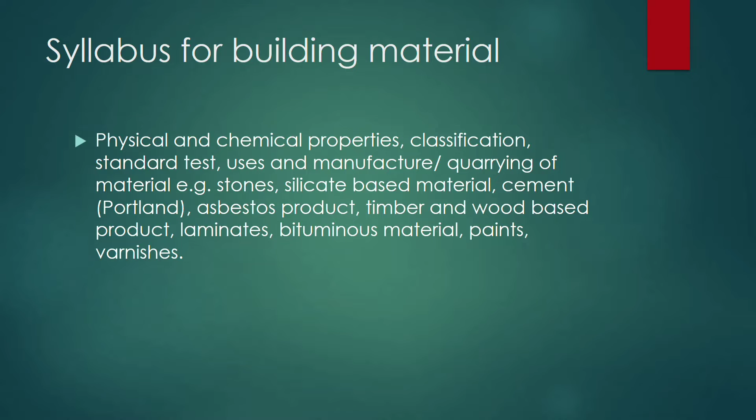And other paint varnish. In this video, I will complete some topics of building material. So first topic is source of aggregate. Second topic is physical and chemical properties of aggregate. And third topic is test on aggregates.

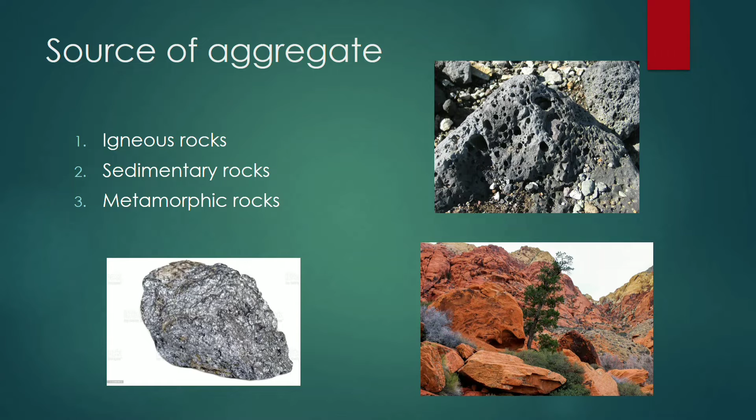First topic is source of aggregate. So there are three types of source of aggregate. First is igneous rock, second is sedimentary rock, third is metamorphic rock. It is formed by weathering actions from the environment. In these pictures are various types of source of aggregate.

Metamorphic rock shows the foliated structure, and in this sedimentary rock the thickness of foliation may vary from a few centimeters to meters of thickness. A very large quantity of sedimentary rock is used for building materials.

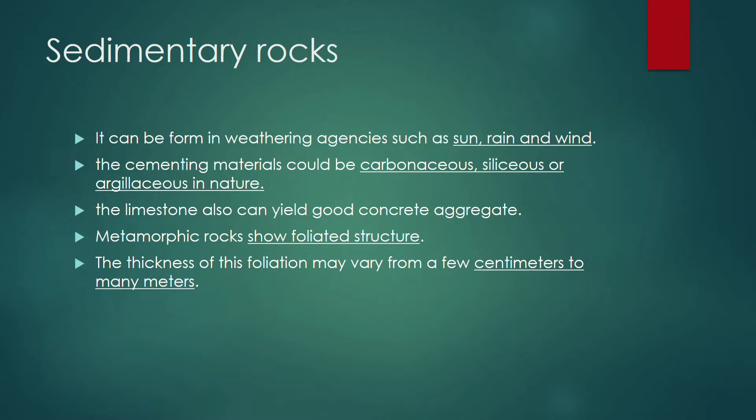Igneous rocks are mostly formed from lava cooling to form this rock. These are very hard, tough and dense rocks, it can be massive structure, glassy material, and the main content will be silica. Color of rock is light color and dark color.

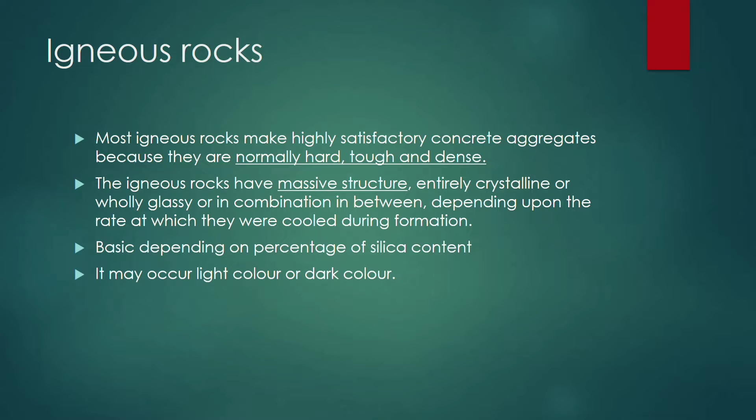Physical and chemical properties of aggregate. So first is size. Aggregates are divided into two types of size: coarse aggregate and fine aggregate. Coarse aggregate is more than 4.75 mm and fine aggregate is less than 4.75 mm. Maximum size of aggregate commonly used in field is 80 mm.

Using a large maximum size will result in reduction of the cement content, reduction of water requirements, reduction of drying shrinkage. Maximum size of aggregate that can be used depends on thickness of section, spacing of reinforcement, clear cover, handling and placing techniques.

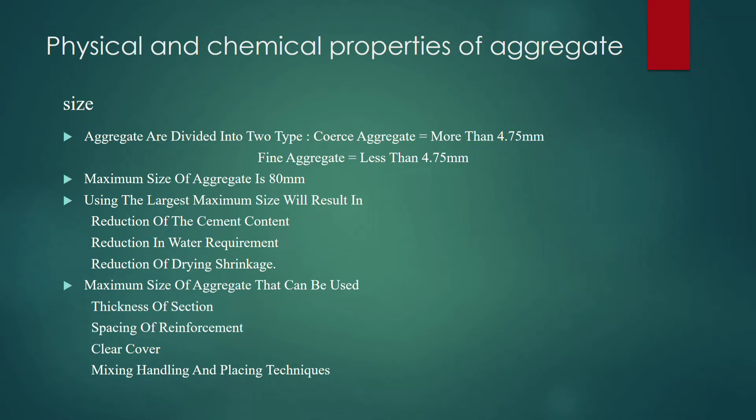Shape of aggregates is a very important characteristic affecting the workability of concrete. From the standpoint of economical cement content for a given water cement ratio, rounded aggregates are preferable to angular aggregates. Angular aggregates give higher strength and sometimes greater durability as a result of interlocking texture of hardened concrete and higher bond characteristic between aggregate and cement paste.

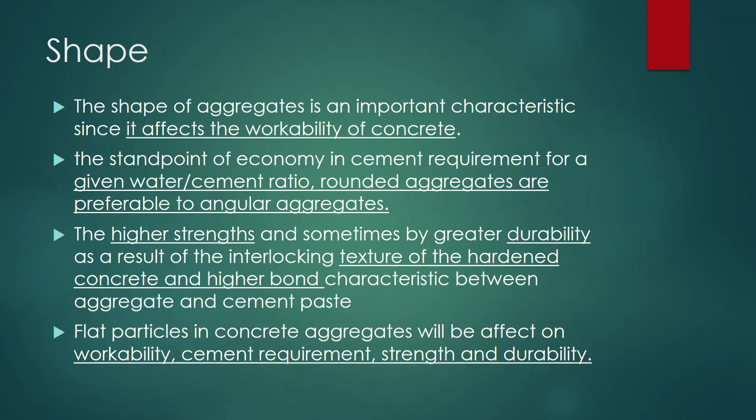Flat particles of aggregate will affect the workability, cement requirement, strength and durability. A very important property of aggregate is shape. Shape of aggregate has four types: rounded, irregular and partly rounded, angular and flaky.

Murdock suggested a different method of expressing the shape of aggregate, called the angularity index. Angularity index formula is fA equals to 3fH by 20 plus 1, where fH is the angularity number.

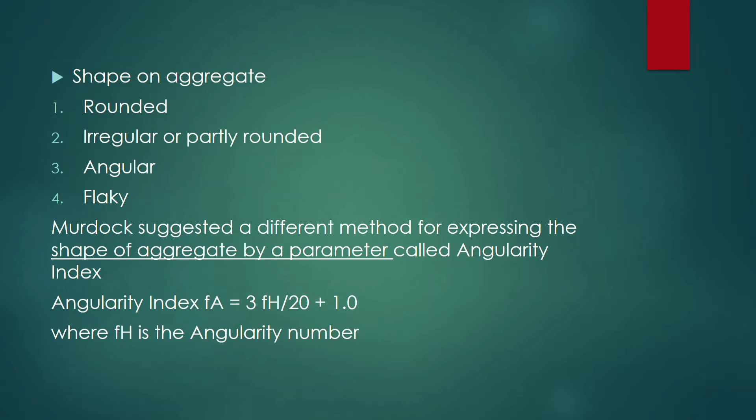Textures. Surface texture is a property which depends upon the relative degree to which particle surfaces are polished, dull, smooth, rough. Surface texture depends upon hardness, grain size, pore structure of rocks. Hard, fine grained material will generally have smooth fractured surfaces. Surface texture affects bond strength, characteristic strength of aggregate: glassy, smooth, and crystalline aggregates.

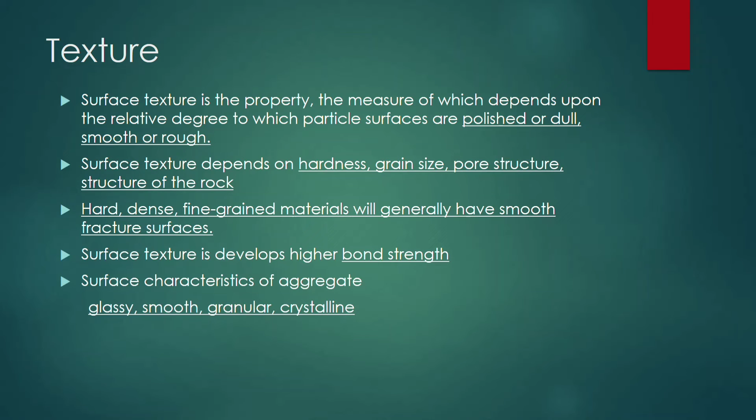Test on aggregates. So first test is aggregate crushing value. Strength of rock is found by making a cylindrical specimen of size 25 mm diameter and 25 mm height. Different rock samples give different compressive strength, varying from a minimum of about 45 MPa to a maximum of 545 MPa. In this, we take a single size of aggregate, passing the 12.5 mm and retained on the 10 mm sieve. The crushing value of aggregate matters for concrete used in roads, pavements and building materials, permanent or other structures.

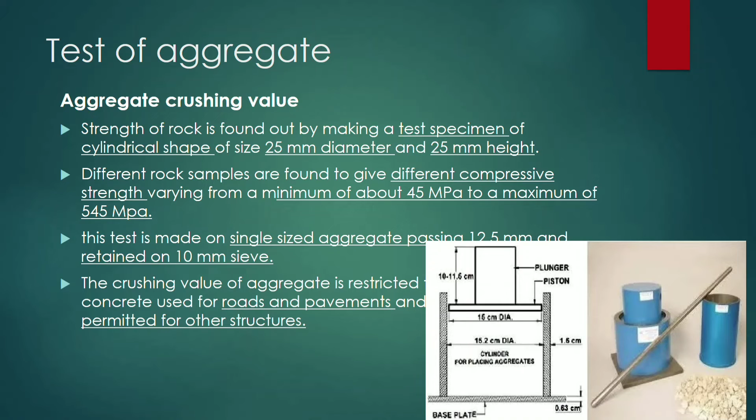Aggregate abrasion value. Apart from testing of aggregate with respect to the crushing value, testing with respect to wear resistance is an important test for aggregate used in road construction, warehouse floors and pavement construction. Common tests for aggregate abrasion resistance are Deval attrition test, Dorry abrasion test and Los Angeles test.

Good rock should have an abrasion value not less than 17. A rock sample with a value of less than 14 will be considered poor. Hardness is measured as 20 minus loss in grams divided by 3. It is a measure of hardness. In this picture, it is an abrasion value test.

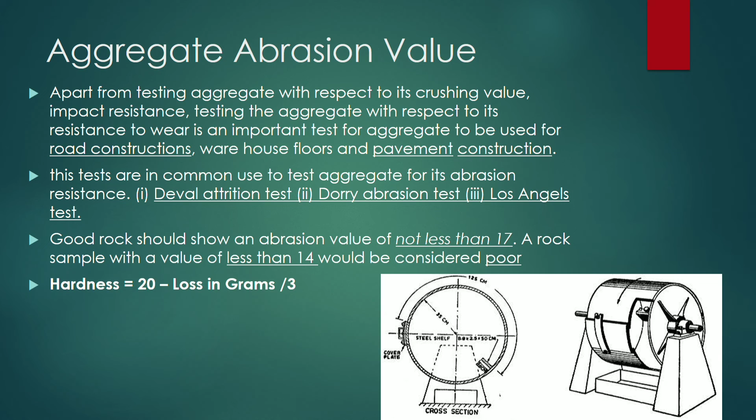Modulus of elasticity. The modulus of elasticity of aggregate depends upon composition, texture and structure. It affects shrinkage, the elastic behavior and to a very small extent the creep of concrete. It is very important for aggregates.

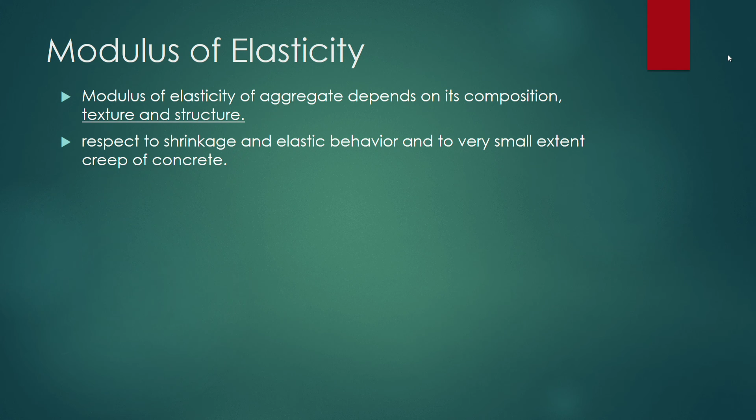So next, bulk density. Bulk density or unit weight of the aggregate gives valuable information regarding the shape and grading of aggregates. Angular aggregate of the same specific gravity shows lower bulk density. The bulk density of aggregate is measured by filling a container of known volume in a standard manner and weighing it.

The bulk density depends upon particle size distribution and shape of particles. It is a method of finding the voids content. Bulk density of aggregate is of interest when dealing with lightweight aggregate and heavyweight aggregates.

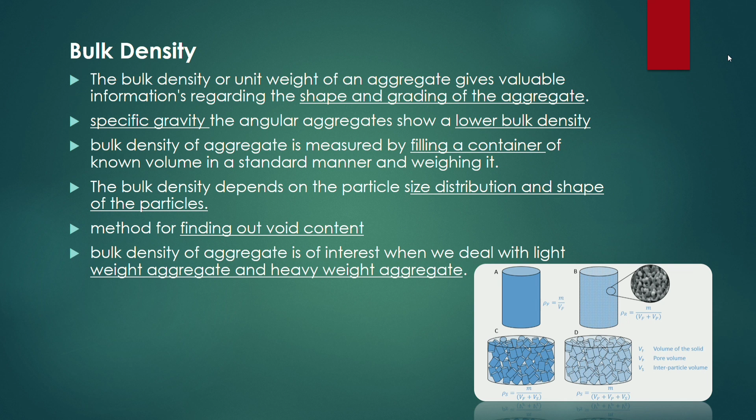Sieve analysis is a very important test for aggregates; it is the operation of dividing a sample of aggregates into various fractions each consisting of particles of the same size. The aggregate used for making concrete normally uses sieves of 80 mm, 40 mm, 20 mm, 10 mm, 4.75 mm, 2.36 mm, 600 micron, 300 micron, 150 micron.

The fine aggregates are designated coarse sand, medium sand and fine sand. Fine sand fineness modulus is 2.2 to 2.6. Medium sand fineness modulus is 2.6 to 2.9 and coarse sand fineness modulus is 2.9 to 3.2.